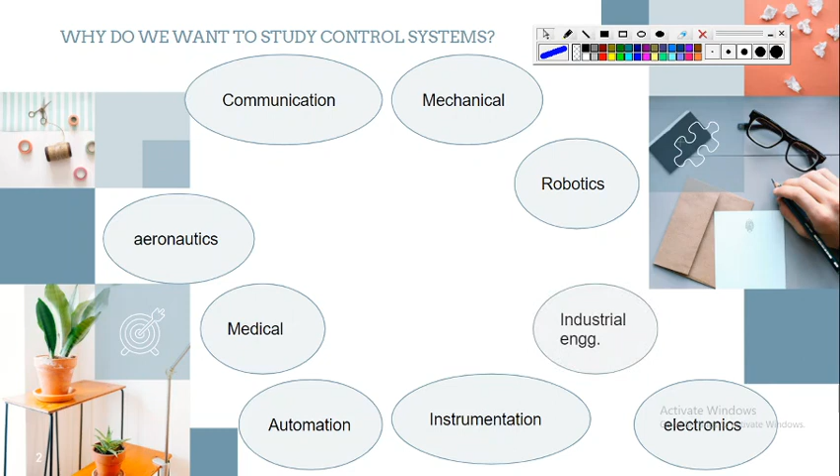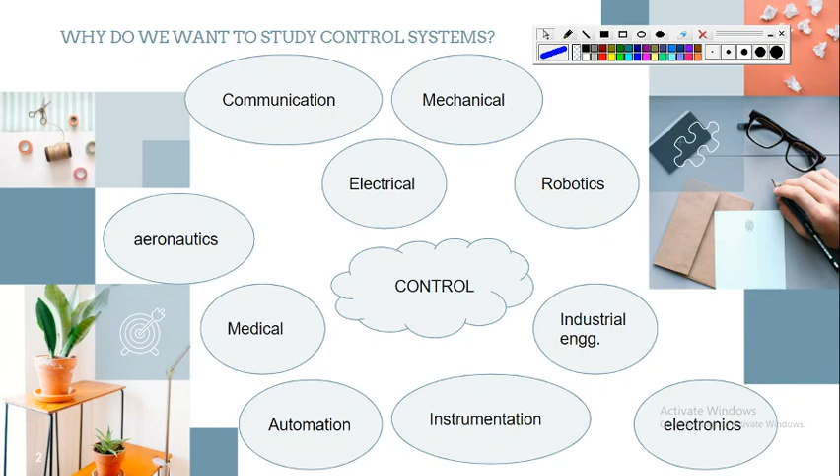And in that sense, we can say that control engineering is not specific to our branch. It caters to mainly all disciplines of engineering in some way or the other. Okay, so it's there in communication engineering, mechanical engineering, robotics, electronics, aeronautics, automation and instrumentation, industrial engineering, and of course our electrical engineering. So it's basically a multidisciplinary subject with its applications almost everywhere. You will find its applications almost everywhere.

So here I have framed some questions, and this will give you a vague idea of what we are trying to go into. Okay, so first of all, have you ever wondered what if there were no on-off switch provided for fans, lights, appliances, etc.? Okay, so that would mean that if a fan is in the on state and you don't have the switch, you just can't turn it off. So you don't have any choice over there but to bear with the fan.

Or in the other case, if the fan is off and you don't have any device to turn the fan on, in that case again you don't have a choice. So you again have to bear that situation. So what exactly is this on-off switch, or simply a switch, doing in this? You can realize very easily that this switch is basically giving you control over turning on or turning off any appliance for that matter.

Thus, this switch becomes a control system, and this control system is designed in such a way that if you want any appliance to turn on, then this switch allows the current to flow, and if you want that these appliances should turn off, then it cuts off the supply. This is the role of the switch. So in that way, this switch is acting like a control system.

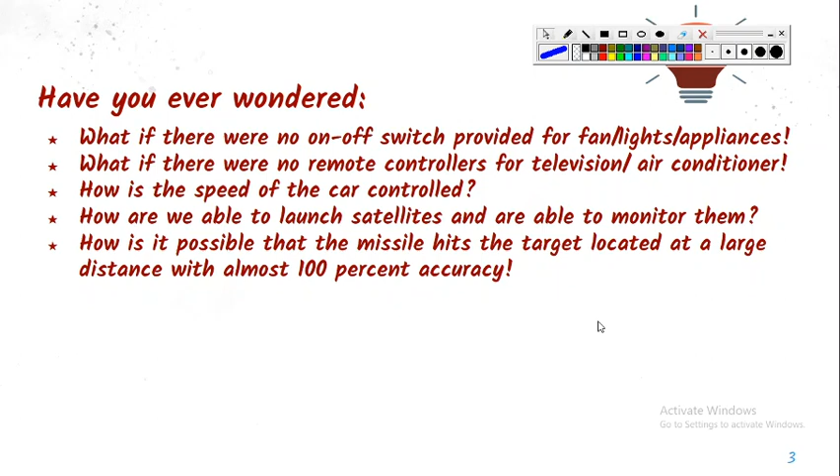So again, there is some system and a lot of controlling action according to our choice is done in order to perform various functions. Thus, a very complex system is designed over there, and that system will be known as a control system. How is it possible that the missile hits the target located at a large distance with almost 100% accuracy?

So, with all these examples, starting from this very simple example, that is a switch, to more complex examples like launching of satellites and using missiles, you will understand that there are various systems involved, and systems are made in such a way that you can control that system according to your wish and will. Hence, the engineering that is involved in this will be known as control engineering.

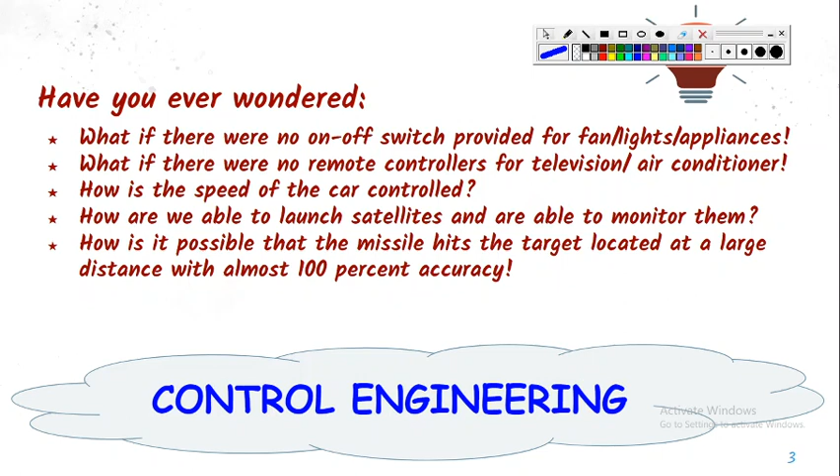And you can see that so much of variety is there. It's not just specific to one particular application. Indeed, in every application, you'll find that if you are making something in engineering, for instance, if you are designing something, there must be some control system available to it. We'll see how.

So here I have enlisted various examples, and these examples have been taken from our daily lives. You have seen all these examples around you, and now you have to think in terms of control engineering: there is some appliance, and what are the control engineering aspects associated with those appliances. For instance, we have fan. Everyone has seen a fan, and in the previous slide also I told you that one of the control aspects of a fan is how we are able to control a fan which is there in a room.

So what functions can you perform using it? First of all, you can turn on the fan or turn off the fan, and that is common to almost all the examples that have been listed. Second, you can also vary the speed of the fan using a regulator. So one more system has to be employed over there.

If you want to vary the speed of the fan, then you have to have an additional system. An additional system will allow you to control the speed of the fan, and if that additional system is not present, your fan will run at only one speed. So that additional system will be the control system of the fan, which is allowing you to change the speed.

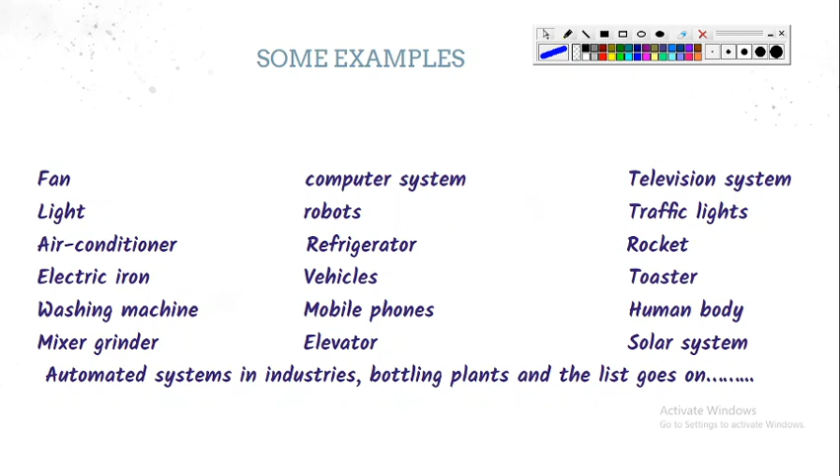so here you can see that we can classify these examples as fairly simple control systems like fan and lights. Then we have a bit complex control systems like robots, because the system that will be made in order to have a robot will require tedious brainstorming, and you have to do a bit more of thinking. That's why this will be termed as complex control system.

And then, yes, human body. I'll say that human body is the utmost complex and sophisticated control system. Why I'm saying that? Because like right now you can see I'm watching the screen, my brain is processing the content and then delivering the lecture, and all this is happening at such a high speed.

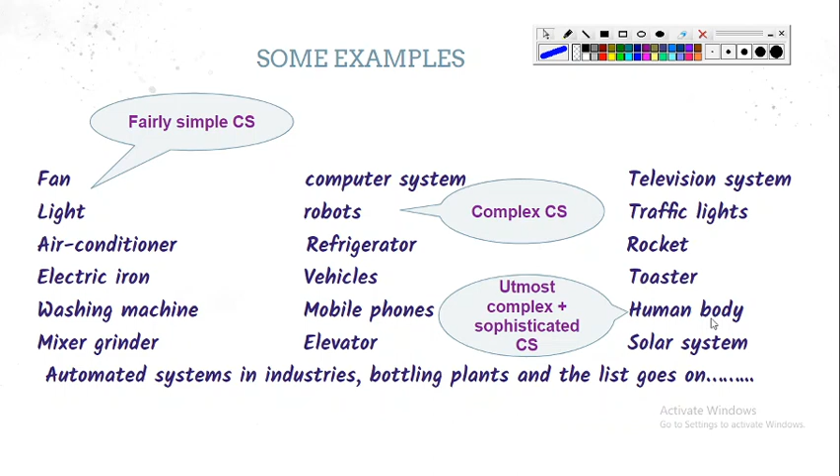And at the same time, my brain is sending the signal to command to move the cursor. So my hand is responding. So amazing, isn't it? That's why I say that human body is a perfect example of a control system.

So after discussing all these examples and where all you can find it, the question comes like, what exactly is a control system? So I would say that if you have a choice in any situation, then that can be called as a control situation. And then a system is a set of things which is working together to perform some mechanism. So if you have a control over the system, that system will be known as a control system.

Because as you have seen that there are variety of applications, and for all those variety of applications, how to design this control system, it will vary. It will vary so much. So that's why I'm considering it as very general, and I'm saying that it's a black box.

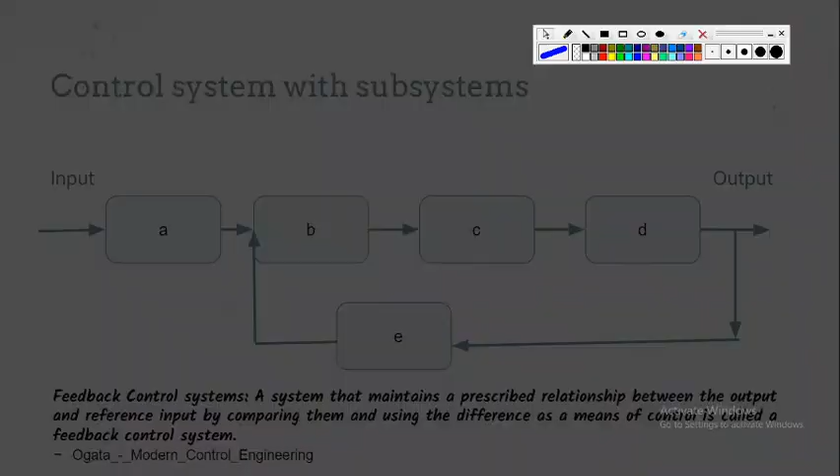Feedback is nothing but you take a part of the output and you compare it with some input. You compare it and that error is then processed forward. That is the concept of a feedback system. Suppose I'll again explain it with the example of an air conditioner like this one. In an air conditioner, I have the same thing.

I wanted 26 degrees centigrade as my desired response, and the output initially was 30 degrees centigrade because the outside temperature was 30 degrees centigrade. Now if I apply some kind of feedback over here, what I'll do, I'll have a sensor at the output. I'll check what is the output that I'm getting. So the output that I'm getting is 30 degrees centigrade.

I take this 30 degrees centigrade and I take this reference level, 26 degrees centigrade, and I compare these two values. When I compare these two values, I find 26 degrees centigrade minus 30 degrees centigrade. So there is an error of 4 degrees centigrade. If there is an error of 4 degrees centigrade, then that error will be provided to this control system, and it will basically trigger something.

I'll say in very layman's language that it will trigger the compressor, and it will ask the compressor to turn on and work in such a way that this error should reduce. So maybe a minute later this temperature reduces from 30 degrees centigrade to 29 degrees centigrade. If it becomes 29 degrees centigrade, then the error will reduce to 3. Again, there is a difference, so it will trigger the compressor.

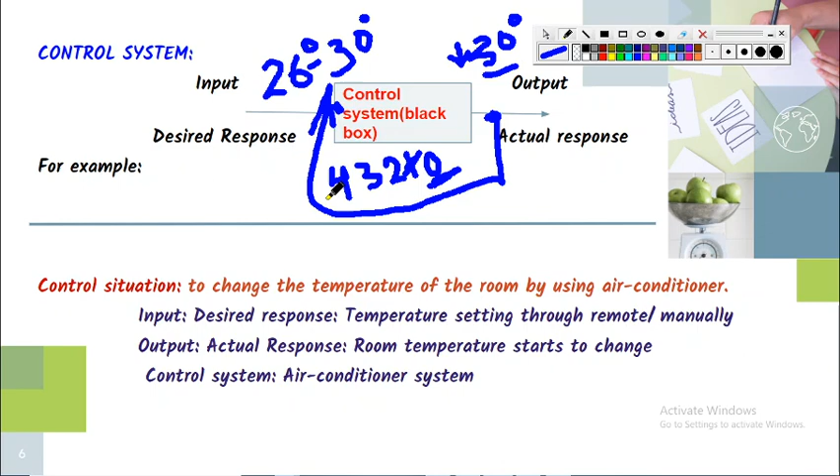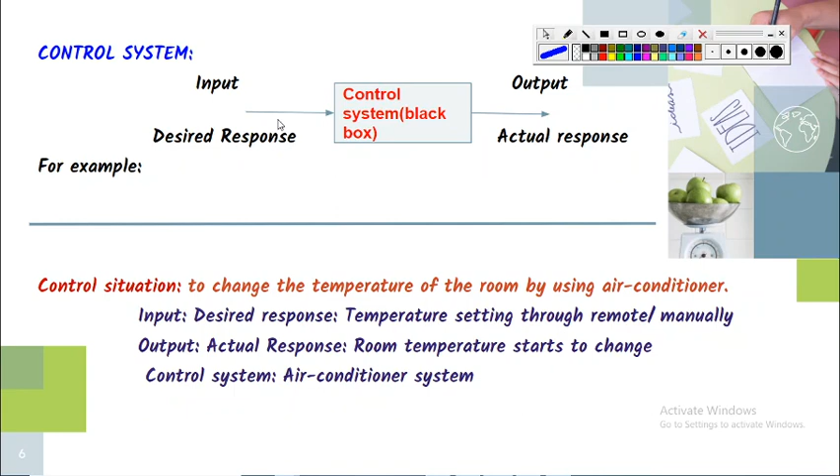So whenever you see that there is some kind of loop involved, your output is actually being compared with the input, then you say that the system is having a feedback. So a system that maintains a prescribed relationship between the output and reference input by comparing them and using the difference as the means of control is known as your feedback control system.

And like the example of the manufacturing plant I told you, in a manufacturing plant you might have various small systems, like there is collection of raw material. That raw material has to be processed. So how much to process and how, whatever the raw material is, you might have to grind it to smaller grains, and then those grains have to be given to another system.

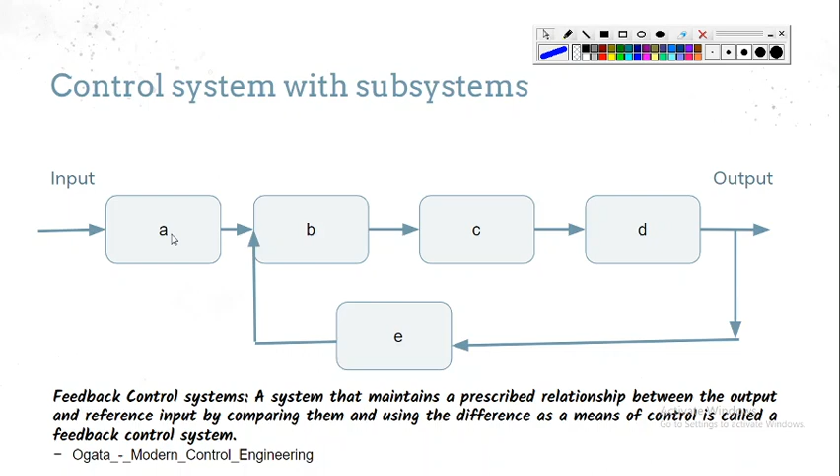Then again some chemical is, suppose, mixed with it and you get some other output, then that output has to be again fed to some other system, and finally through various stages the output of one is given as the input to the other, and at the end you are getting some output. In that case you say that there is a control system having various small control systems, so it has various subsystems.

Now here I have taken some kind of short case study. Compare the two control situations. One situation is that there is a farm where some X crop is grown, like rice. And then there is a condition: this crop requires water for a particular moisture level in the soil, say Y. So you can say that Y amount of water is needed for the soil in order for the crop to grow.

Okay, now you have two cases over here. First case is a pump is employed and it delivers water for a fixed amount of period which is set as per the moisture level condition Y. Okay, and the second case is pump is employed with sensors in the soil which, when they sense the moisture level as Y, give the signal to stop the pump.

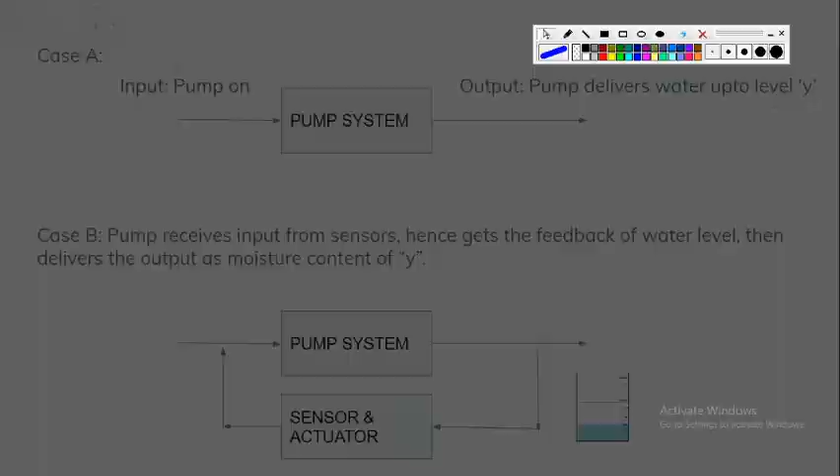While in the other case, in case B, if this pump system doesn't work, then what will happen? If it doesn't work, then it will be sensed by this feedback loop, and the output is continuously monitored over here. This is where you can easily understand this is a closed loop system, and this is where your closed loop system has advantages.

Okay, this case study was given only to tell you what are the advantages and disadvantages, or how you can differentiate an open loop system from a closed loop system. In an open loop system, there is input, there is control system, there is output, but you are not comparing your output with the input, so that becomes your open loop system. In a closed loop system, you are comparing the output and checking it with the desired input.

Your actual response and your desired response are actually being checked, and that gives you control over the accuracy, or if there is some fault in the system, it gives you control over that also. But yes, the disadvantage of this system is that it will be a bit complex and a bit costly.

Having discussed all this, we can now compare closed loop, or feedback systems, with open loop, or no feedback systems. In closed loop systems, you can easily say feedback is being used. In open loop systems, there is no feedback at all. In closed loop systems, there is actuating error. In the air conditioner example I told you, actuating error is nothing but the difference between the input and the feedback signal, and it is used for the desired output.

Feedback causes the system to become relatively insensitive to external disturbances and internal variations. In the pump case, you can understand it very well. If there is some disturbance, if the system is not working properly, then your output will definitely get affected. But as this output is being compared with the input, if you are getting some error, that is going to affect this pump system. So it's a kind of loop system. If you have error there, it's going to be fed over here in order to reduce the error.

Hence, if you have some external disturbance or internal variations in the system for whatever reason, your feedback system will be relatively insensitive to it. It won't affect the operation of your system. Whereas an open loop system is sensitive to parameter variations.

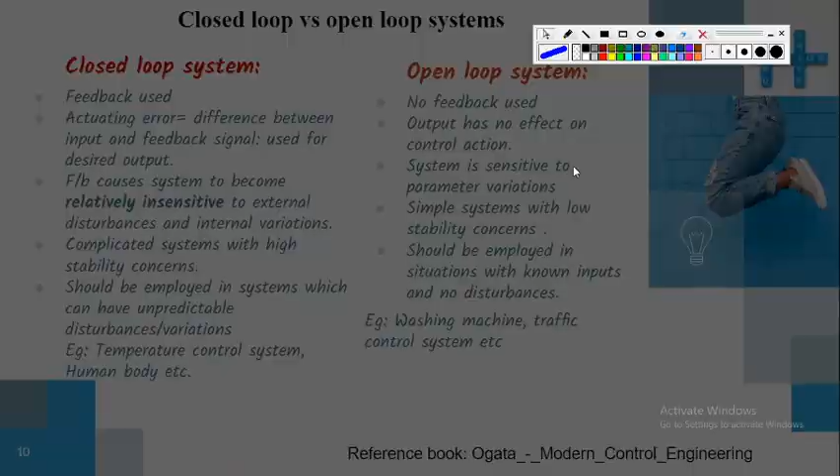Here, you have made the pump system, and the pump system will have many components in it. You belong to the electrical engineering stream, so you can very easily understand that there will be components like resistive components and other components, which might change with time. With temperature, there will be variation in various components. So with time and with the change in temperature, your pump system is not working properly for what it was designed for.

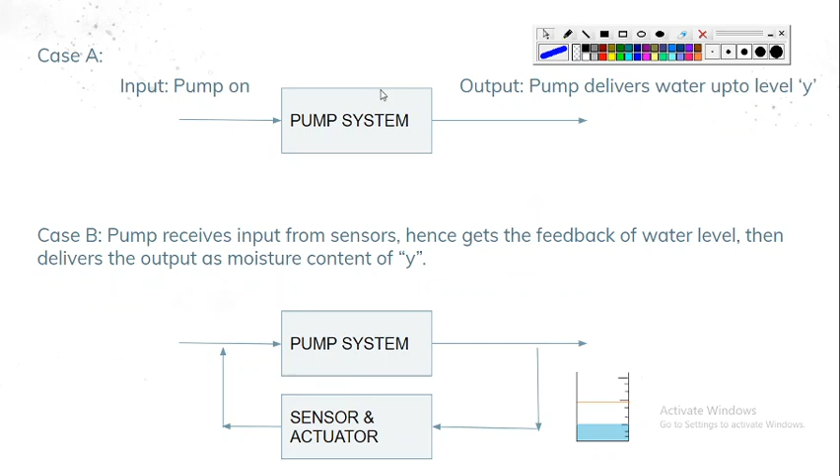In this example, I said that the pump is on for 10 minutes and it will deliver the water level up to Y. But if this pump system is not working, then with time and variations, it might happen that the internal system is varying, and hence your output is getting affected. But here you don't have any measures to mitigate this, to reduce this problem. That's why we say open loop systems are sensitive to parameter variations.

Next point: these systems are complicated systems with high stability concerns. Very important point. And these are simple systems with low stability concerns. We will discuss this later in detail, but one major misconception we generally have is that we are using closed loop systems to make the system stable.

But the fact is that the feedback that we are using might actually make the system more unstable. In many interviews, they ask this question: why do we use feedback? And most of the students answer that it's used to increase the stability of the system. But in fact, it might actually reduce the stability of the system. Okay. Stability is not the criterion to use a closed loop system.

Closed loop systems should be used where the system is affected by or is vulnerable to external disturbances. Okay, these are relatively insensitive to external disturbances and internal variations. So in those conditions where you have a large number of external disturbances due to which your system might get affected and output might actually vary a lot, in those cases you should definitely go for closed loop systems.

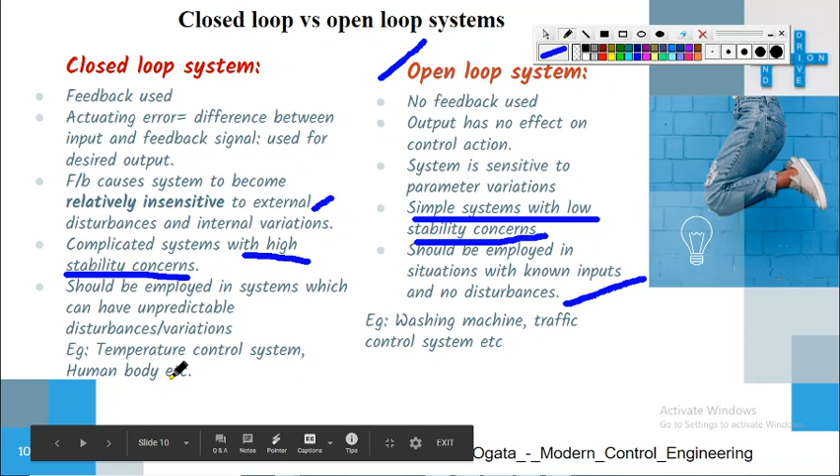For example, your traffic light control system, your washing machine, these are examples of open loop systems. Closed loop systems: your temperature control systems; the human body is a closed loop system. Okay. So here I have given the block diagram of a generic open loop system. For any open loop system, it can start with some input or the reference, and we have various subsystems over here. We have got three subsystems, you can say.

The first subsystem is your input transducer. Your input can have some different property. This input transducer can convert this input into a form which can be used by the controller. Like if your input is, suppose, some audio signal, then this input transducer will convert that audio signal into some electrical signal, because your controller can understand electric signals but it cannot understand your audio signal. So in that way, you can have any kind of input, and the input transducer can convert it into the form that can be used by this controller.

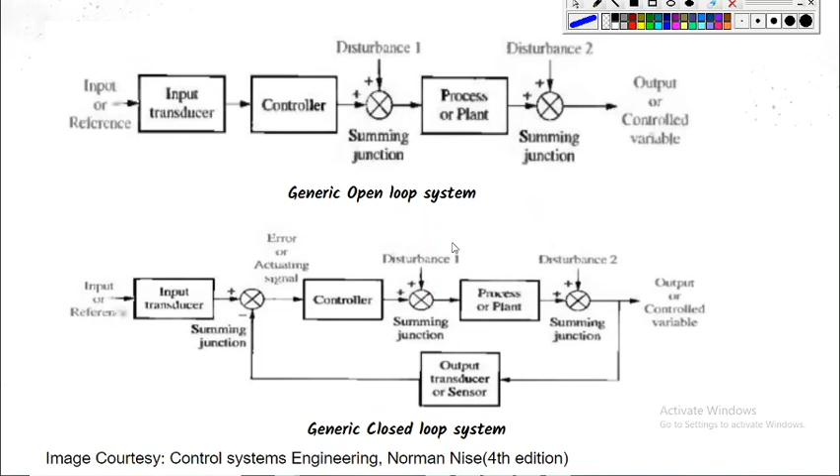By the way, transducer means a device that converts any physical quantity like temperature, pressure, sound, brightness into electrical signals, and vice versa. So here the output transducer takes the output and converts it into a form again suitable for the controller, and this system can actually compensate for disturbances. Thus, they have greater accuracy than open loop systems. They are less sensitive to noise and disturbances. So now you can easily differentiate between open loop systems and closed loop systems.

Okay, so with all this knowledge about control systems, I will end this today. There is a little home assignment that I have given. You need to think about any control situation and make the block diagram for it. Identify whether it is an open loop system or a closed loop system, and simply do it on a piece of paper and send the scanned copy to me at the link which I will provide shortly.